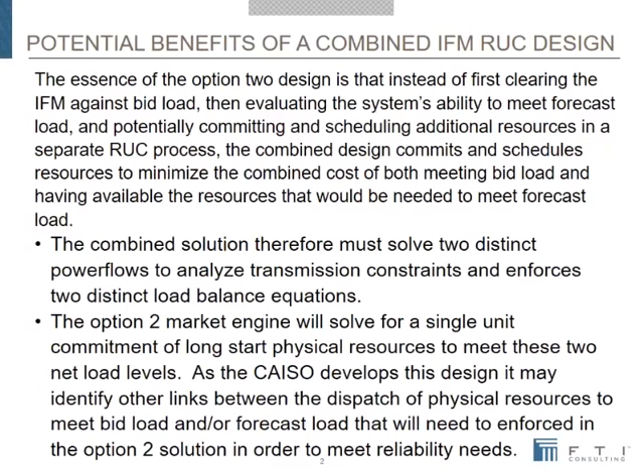Shammy's gotten everything fixed up wonderfully over the break, so that's why we needed to take it. Can I do my talk again? No.

I have a brief table there explaining my view of Option 2. I'm not going to go over that.

The first substantive slide here builds on some of the discussion in the workshop last week. The way I look at Option 2 is that while it's designed to accommodate the CAISO market, it also accommodates the operation of a traditional utility or a load-serving entity, as we have in the CAISO, to meet their load at least cost consistent with past practice. I don't think anything about this really changes how they have to operate—the utility can use their judgment to decide how much of their intermittent energy output they should rely on in buying power from others. They can judge how much they want to expect to buy real-time economy energy as opposed to buying energy day ahead, and make sure there are enough resources available to meet real-time load, which is just how vertically integrated utilities have operated for many years. They don't always buy enough energy to minimize cost day ahead; they recognize there'll be more economy energy in real time, so they hold off on some purchases, but make sure they have enough capacity or resources to turn on to meet load. So I think the design provides flexibility for vertically integrated utilities in the West, as well as California load-serving entities, to manage their resources.

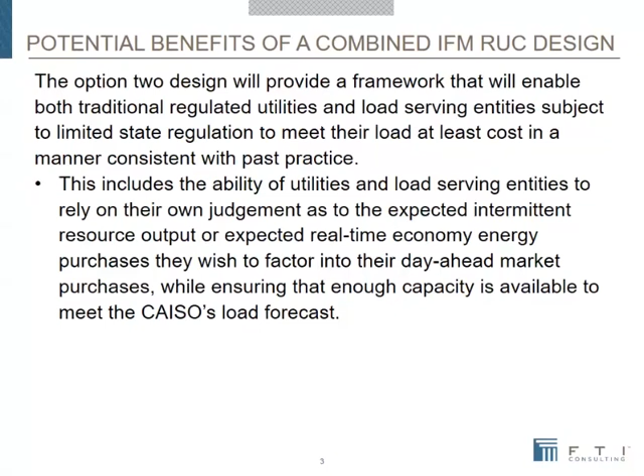There are five, as I look at it, potential benefits—and they're potential benefits, you don't necessarily realize them from Option 2—relative in some cases to the current RUC design, and in some cases relevant to the Option 1 design, and they're different. Sometimes they're different benefits relevant to different options, because there are a lot of different ways of doing it. I'm not going to talk about all of these in great detail, but some of them.

To go over them—a lot of these the CAISO has talked about—there's going to be more efficient commitment of long-start units and perhaps other long schedule commitments. We'll have binding day-ahead market schedules to cover all resources needed to reliably meet the CAISO load forecast, which isn't true today under the current RUC design, and they'll have compensation for the costs they need to incur. There'll be efficient and consistent prices across the resources scheduled to meet the IFM bid load or the CAISO's load forecast—again, that isn't true under the current design. And we'll have assurances that resources committed to meet the CAISO's load forecast can be dispatched to meet that load, which we do have today under the current RUC design, but might not have under some of the Option 1 designs.

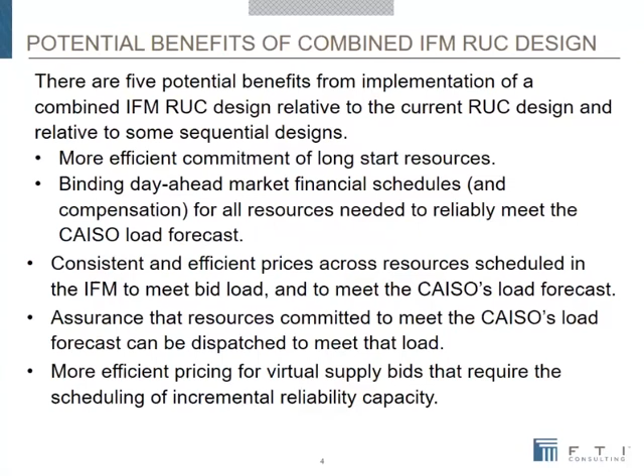In my view, we'll probably have more efficient pricing for virtual supply and demand, particularly virtual supply that requires the scheduling of additional reliability capacity—we'll see an appropriate price.

Now, the first one, in terms of the more efficient commitment of long start resources, this is a potential efficiency, but of course it only applies because we'll have more efficient commitment since we won't get into the potential of committing resources in the IFM and then committing other resources in RUC.

Then knowing that actually if we looked at all that problem together, we would have made a different decision. But as Michelle's pointed out and other people have pointed out, as we have fewer long start resources, that's going to be less important. It's also less important even today to the extent we're not committing resources because of the CAISO's load forecast, but because we want more flexible capacity or something else.

Because it's not clear how many of our commitments, even of long start resources, and I don't have the intimate knowledge of the CAISO and DMM of all this, but reading the things that are written, it sounds like operators are committing resources in RUC for a lot of reasons, not all of which have anything to do with the load forecast. So to the extent they're doing it for other reasons, first, if we can address those other reasons, we don't need to worry about the more efficient unit commitment. And if we don't address those other reasons, we have to recognize they're still going to do it.

One way or another, if we're not getting the right resources committed in the IFM, the combined IFM, in terms of flexible capacity or whatever it is, it's still going to happen. So this is a benefit, but we have to assess how much there's going to be.

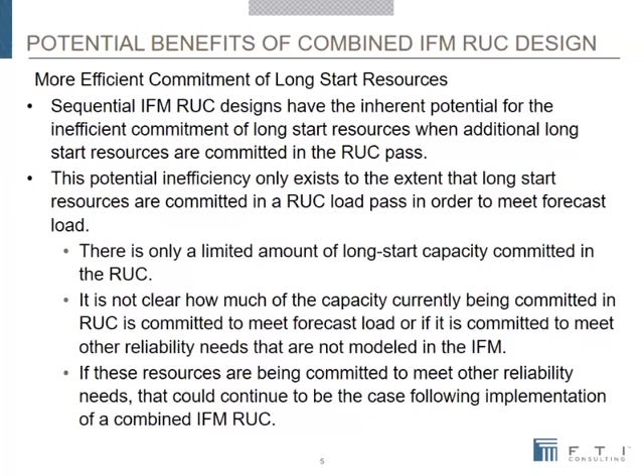The second one, which I think is important, is binding financial schedules for all resources needed to reliably meet the CAISO load forecast. And today we commit resources in RUC, and it's not just the CAISO, it's the same thing that MISO does and PJM and New York.

They commit resources, but they don't get any binding financial commitment, they don't get paid so that they can afford to schedule gas. They just get assured that they'll be able to recover their minimum load costs. And in my view, this is not working well anywhere. And it's increasingly not working well as the resource mix changes. And of course, California's got the most changed resource mix, so California is probably going to have to deal with it sooner than anybody else.

Did I do that? I guess the wind stopped blowing.

So I think that this is an important benefit, and I think most of the designs we're talking about will achieve it. And maybe we don't need it this month or next year, but it's going to be increasingly important as the system becomes more energy limited, we have more resources that are use limited, we're going to need to provide compensation for resources to buy gas and make other commitments.

So this is an important long-run benefit in my view, although I think we can achieve it with both option 1 and a number of versions, and option 2 and several versions of option 1.

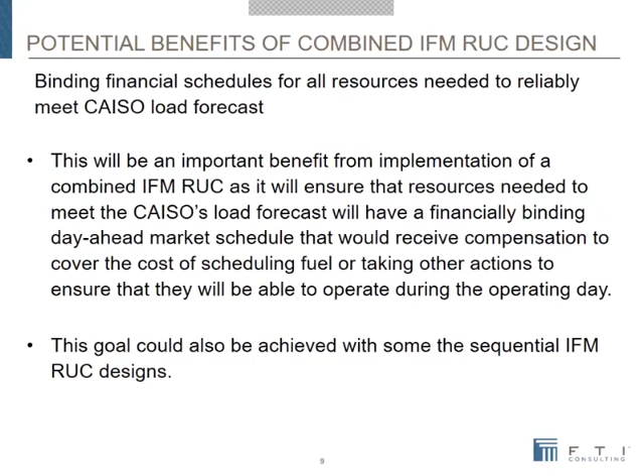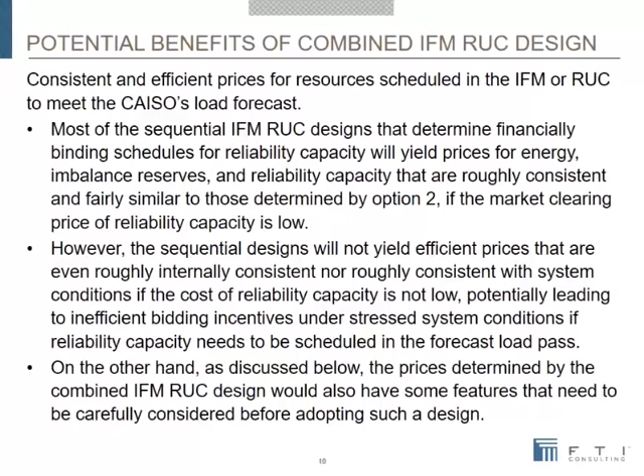The other... I think another important benefit that I don't think the CAISO has emphasized as much in its slides and discussion, is that it addresses some of the issues we have with the impact of virtual supply and virtual demand because of the explicit pricing of reliability capacity up and reliability capacity down.

So if you have virtual supply that proxies for variable resources that are being physically withheld from the day-ahead market and are not there, then when we get virtual supply that replaces them, that shouldn't force any commitment of additional resources. So that should be treated just the same as physical supply because it's moving us towards the right equilibrium.

And if we don't have to buy any reliability capacity up under this design, they clear at the same price as physical capacity. But on the other hand, if we have virtual supply that's in excess of the resources that show up in the day-ahead market and require us to buy additional reliability capacity up, then that reliability capacity up is going to have a price, and the virtual supply is going to clear at a lower price by that amount than the physical supply.

So we're going to have a more efficient signal in terms of virtual supply when it's moving us closer to where the CAISO forecast output to be, and therefore isn't requiring commitment of additional units, is actually eliminating the need to have reliability commitment. They won't pay that price, but if they're moving us in the other direction, towards having to make other commitments, then they're going to see a lower price, reflecting the cost of those other commitments.

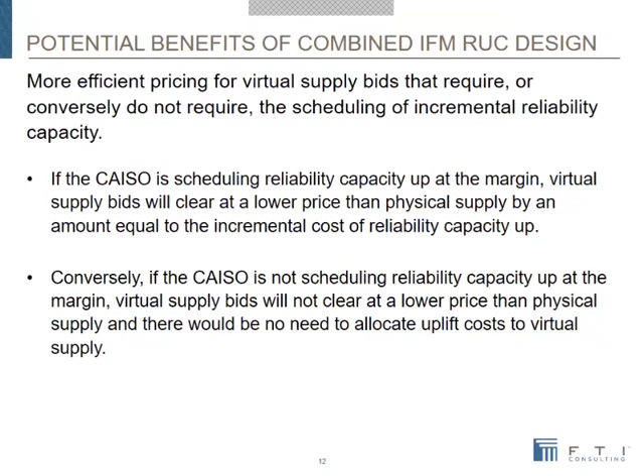There are a few challenges, I think, to get to the other side of it, as Michelle asked me to, and I can talk about some of them. Some of them I think you can just read, it's straightforward.

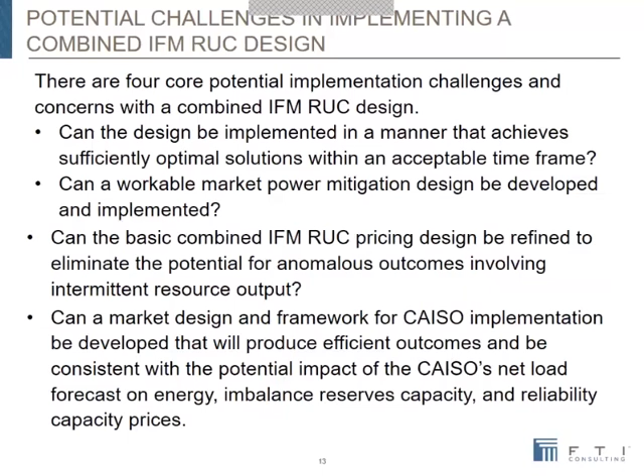I think one of the key issues is just, can we do it? What are the impacts on solution time of doing it? That's really the first thing we have to be sure of, or at least reasonably confident, that we can implement this, and that the implementation will not have such severe impacts on solution time that we're worse off. Now, it has the potential to improve solution time, because compared to now, you won't have to run two passes, an IFM pass and a RUC pass. You're just going to do it combined.

But there are some solution challenges. And I know the original reason the sequential approach was developed was because the vendors said they didn't know how to solve the combined problem. But now it's later, and I think it's got some challenges.

So that's, I think, the first question the CAISO has to work down the road a little bit: can we solve this on a constrained network with all these things that have to be enforced between the two solutions? So that's a qualification, but it's not anything negative, just something we have to make sure we can do.

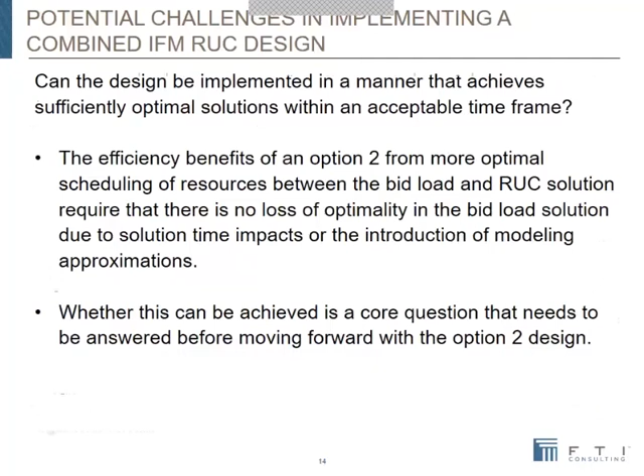I think the market power mitigation, we have to deal with it. I don't think there's anything real complicated about that at this point, so I'm not going to spend time on it. This is one of the issues we've been talking about.

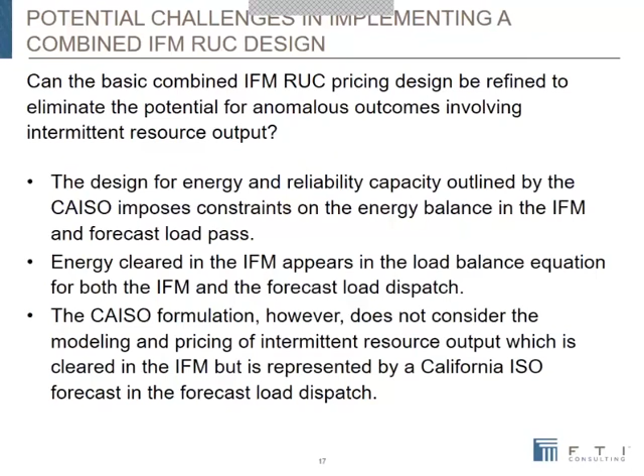My concern about the equations is that we've been talking about just equation 1 having just energy, but it's actually got cleared energy on thermal units and cleared energy on intermittent units. And the load balance equation 2, the output of the intermittents that clear in equation 1 isn't in there, it's just the CAISO's load forecast.

So if a generator gets paid lambda, the shadow price of equation 1, for its output that's cleared in the IFM, and only gets paid the shadow price of equation 2 if it's in equation 2, that means all intermittent resources that clear in the day-ahead market would get paid less than thermal resources, which isn't the right answer. I think there are ways to solve this, I talk about a couple possibilities over the next couple of pages, but we need to think through them.

Their alternative approaches have impacts. So I think the CAISO needs to talk a little bit about how exactly are we going to compensate the intermittents, the amount that they're bid in the day-ahead market versus the CAISO's forecast. We don't want to pay them if they bid more than the ISO's forecast, so that the ISO ends up committing forecast load for them, but on the other hand, we don't want to pay them less than their value. So that's an issue that needs to be worked through.

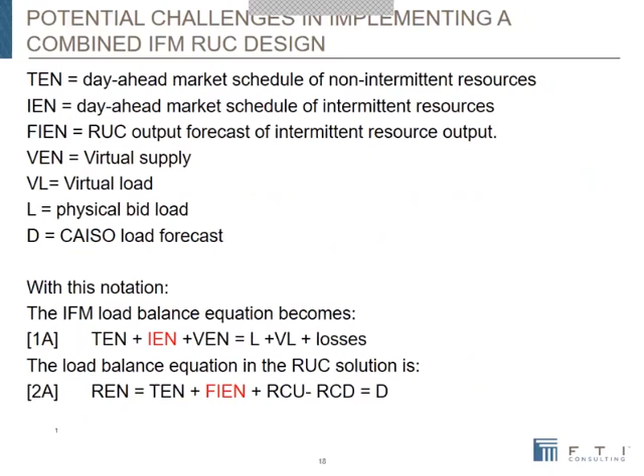And these sort of talk about that problem. I'm sorry, Carrie?

Carrie Bentley with the Western Power Trading Forum. So it seems like you're skipping through these very quickly, so I'll just say I appreciated them, and that's good. And while you're thinking about that, can you think about storage too? Because it seems like storage is going to be paid lambda, but then pay to charge. So to me, I think there's a disconnect there - if your discharge is paid, under the current formulation, the sum of the shadow prices, but then because it's load, it would just charge at lambda, or the first shadow price. So that's confusing to me too.

Well, I mean, it depends - if it were charging in the day-ahead market, and if it's both charging and discharging in the day-ahead market, which it will be, then I think the prices will cancel out. It wants to charge in an hour in which lambda is low, and I'm not sure because they're saying it's going to be allocated outside the market, right?

What is allocated? The reliability charge. Okay. Now we got to the second one. That's the other place where I disagree. But that's the proposal.

I think the way I look at these, as I said, if you look at the examples I put out, you can see that if a physical generator clearing in IFM gets paid the sum of the two shadow prices, that will generally equal its incremental cost if it's marginal. In a few cases, it'll be higher than its incremental cost because there's an opportunity cost of providing the RCU, the reliability capacity up.

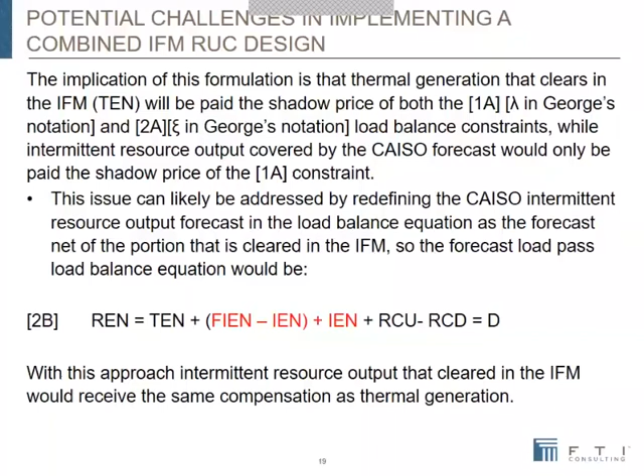So I got out the other thing that I don't agree with, which is that I think the cost of the reliability capacity shouldn't be socialized, but should largely be charged to the real-time load, and the error, the part that we get that's extra because the CAISO's forecast is too high, that will need to be socialized, which gets to the remaining couple of issues here that are not really disagreements, they're just challenges. They're things we have to take seriously. I think the one impact of...

The combined approach—and it's also under some of these option one approaches—is that the CAISO's load forecast is going to have more market impact. So it's something the CAISO's going to have to be comfortable with, and the market participants are going to have to be comfortable with, and the CAISO can't have a purely mechanical approach. I think there's going to have to be judgment applied as to what's a reasonable forecast, and that may make people uncomfortable. So it's going to have market impacts.

It can, because there's potentially an interaction between the price of reliability capacity up or flexible capacity up and the price of energy, but especially the difference between doing it in two separate processes versus combining it.

There's going to be more interaction, so the CAISO's forecast has become more important. I also think that the imbalance reserves penalty price is going to be significant. We have to think about when we start scheduling RUC and the imbalance reserves in the day-ahead market.

There's more potential for all of those things to add up to a high number relative to supply and drive up the price of imbalance reserves and flex ramp. But we ought to think about what the shadow price of the imbalance reserve should really be. Should it really be $247? Do we want the price to go to the clearing price of energy plus $247 if we don't have enough to meet the CAISO's load forecast plus the flexible capacity up requirement?

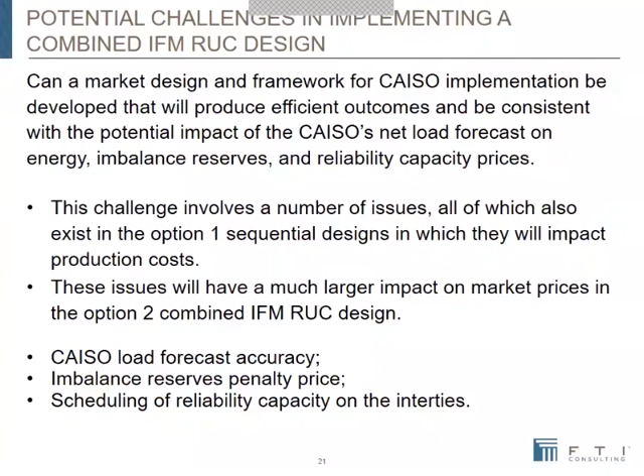This takes us to our third and last substantive agenda item. So, Gabe, we're going to be talking about default energy bids for storage under ESDER 4 with a focus on cycling costs. I just posted the shortest presentation you've ever seen, one slide. That's because it's copyrighted material that can't be posted on the ISO website. I will be showing a slide of that material later, so my presentation is actually two slides, which will follow his.

All right, I guess I'm signaling here the beginning of the end. Okay, yeah, so as Ben said, I'm going to talk about... Churchill said this may not be the beginning of the end, but it's the end of the beginning. Yeah, something.

We are talking about storage default energy bids. This is something that we're taking on in the ESDER 4 initiative. For everybody who doesn't know, I'm Gabe Murtaugh, Senior Infrastructure and Regulatory Policy Developer here at the ISO. Essentially today we'll talk about the items that we've been discussing in ESDER 4 through that initiative, and I've just outlined a few high-level bullet points to walk through.

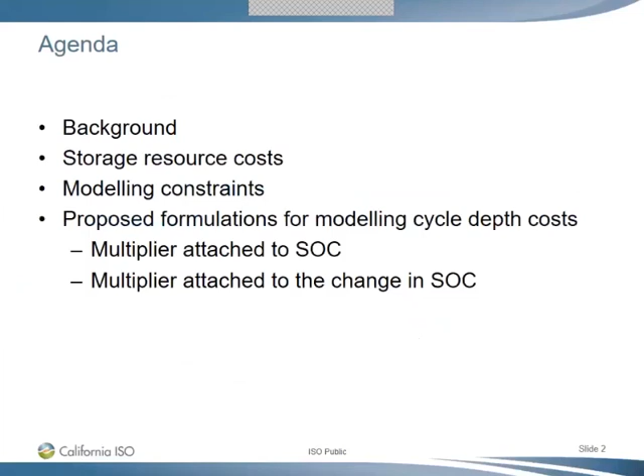First, there'll be a little bit of background on storage resources in the ISO system and the direction we see them heading, storage resource costs, and modeling constraints that we have here in the ISO with our current market systems and designs. Finally, and this is sort of the meat of the presentation, we'll go through two different proposals for how we could potentially model cycling costs. One has to do with attaching a multiplier to the specific state of charge for the resources, and the other is attaching a multiplier to a change in state of charge from one interval to the next interval.

So getting into the presentation, in the ESDER 4 initiative, the ISO is proposing to implement a default energy bid for storage resources. Currently, there is no default energy bid for storage resources. This isn't such a huge problem, as I think the ISO currently has about 150 megawatts of storage installed on the system. That's grid-connected, utility-scale batteries, not including anything behind the meter.

There's a considerable amount of storage in the interconnection queue to potentially join the ISO system, and the CPUC in their most recent RA proceeding has been discussing potential RA shortfalls in the next few years, and mitigation measures to address those shortfalls may include procurement of additional storage resources. So there may be much more storage coming onto the system in the next few years.

If that were to happen, we'd want to start thinking about default bids and how we would treat storage resources in the system, and try to have our hands around marginal costs for those resources. So that's what we're trying to tackle here.

Storage, in addition to the RA issues I brought up, has also been proposed as a solution for local issues. There's a resource retiring, and a transmission project may be expensive or take a long time to implement. A storage resource may be proposed as a stopgap solution.

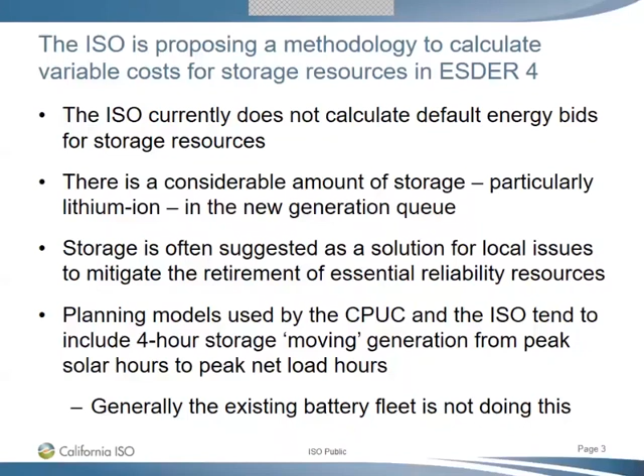Yeah, and that's specific to the real-time market. Yeah, I agree with that. Okay, so on to the next slide.

One question that's been asked is, if those spreads at different times line up fairly well with net load curves, why don't we see storage resources on the system doing this today? Well, there are a number of reasons, but primarily they're not looking to capture a spread between those two time periods because it's expensive to charge the resource and discharge the resource.

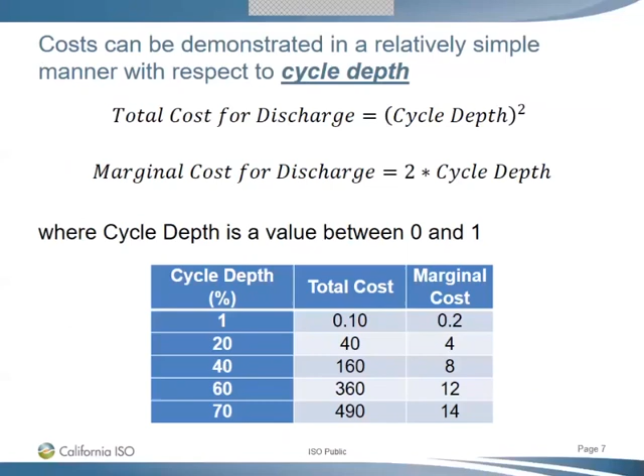It's Adam Slother from DMM. If you go back to slide 6 for just a second—so when you say estimated cost and estimated replacement cost, are you talking about cell augmentation cost or full replacement of the resource? I'd have to double check that.

I think it's cell augmentation, but I'd have to double check. I'd say it's an important distinction to make, because at the point that you're talking about reflecting the full cost of replacement of the resource as part of a marginal cost, I think that's a different paradigm and something we don't necessarily want to do. The cell augmentation, I understand, gets a little tricky because at some point when you've replaced all of the cells, you've essentially replaced the resource, but it seems like there's still a little bit of a distinction there, so it'd be good to clarify.

I agree with you there. I think one of the challenges we might end up having is actually estimating those cell augmentation values, and we may need to use potentially full resource replacement costs as maybe a proxy for that, but perhaps not.

So far, we have reached out to several stakeholders and some of the manufacturers, and we've had a lot of trouble nailing down real numbers. There are some capacity numbers in the industry literature, but a lot more storage resources are used in the automobile industry than in electricity currently, so those numbers are more readily available than utility-scale storage numbers. Those are all pieces of the puzzle that need to be parsed out, and it's relatively complicated to get a good estimate on what replacement costs might actually be.

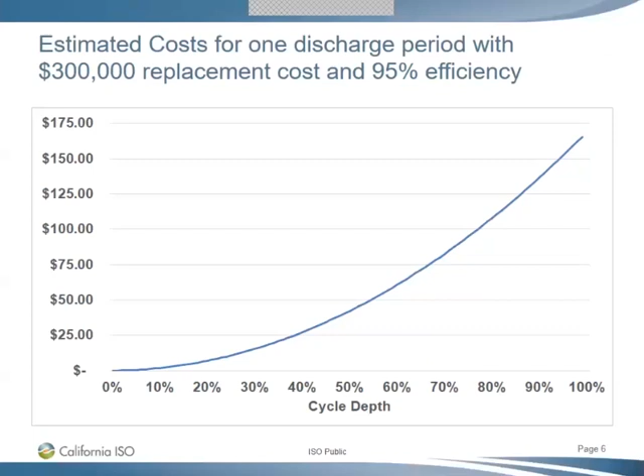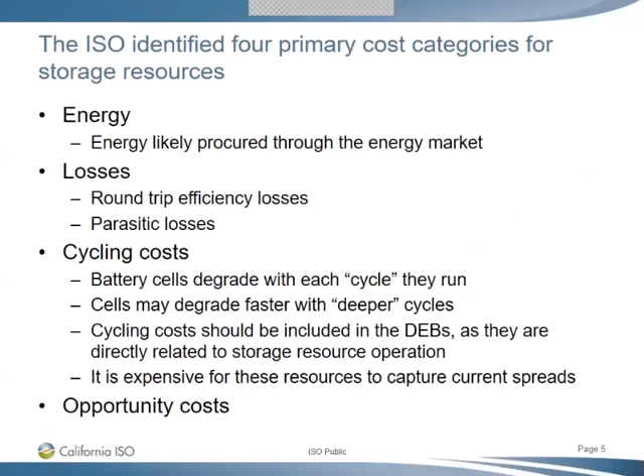Can you go back one slide on page 5? Just for my education, what does it mean when you say it's expensive for this resource to capture the current spread? Can you give an example? Sure, so today...

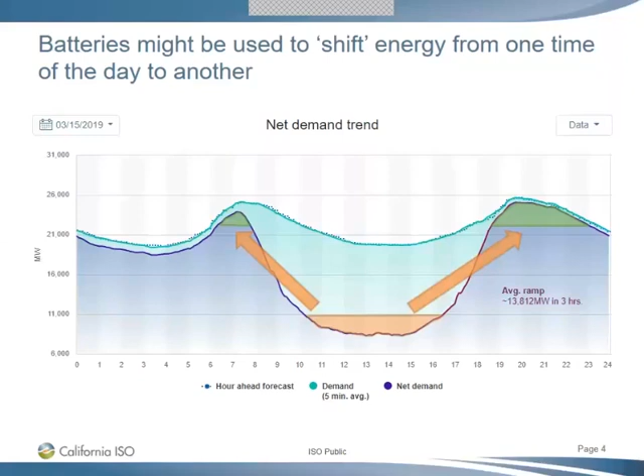So thanks, Graham. Any other questions? Shami, anything on the phone right now? Seems to be a good call. Good point. Okay.

So we've laid out two potential ideas on how we could capture marginal cost for resources, and specifically the marginal cost related to cycle depth.

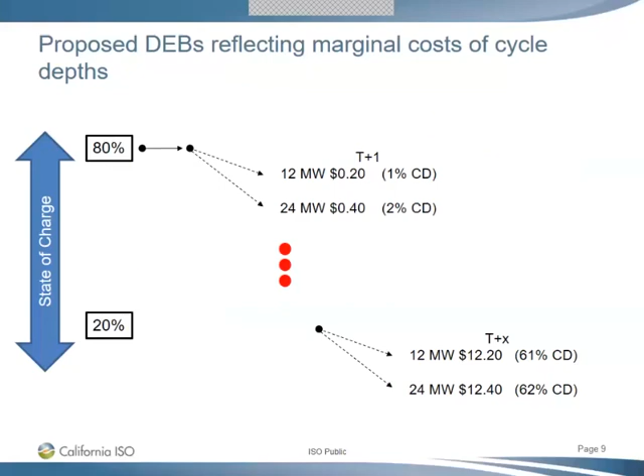Okay, so pros and cons to modeling the resource in this manner. Pros: if we assume that the cycle depth is just the cycle depth squared, then we can be assured that this model will always be greater than or equal to the cost to operate the battery. This aligns with increasing marginal costs, so as you go deeper into a discharge cycle, the costs increase, and that's what we've read in the literature. That actually happens here in this model.

And then the price for any discharge increases as the state of charge decreases, and the market outcomes will tend to charge the battery because it prefers to operate closer to the 80% range than the 20% range. Graham, to your point, we might add something that says if you're operating between 60 and 80 where it might be more expensive, there could be an additional adder there to prevent the resource from always going back up to the 80% state of charge.

The cons to this model is that it may actually grossly overestimate the cost to produce. Remember, cycle depth is a function of where you start your discharge from and where you end. So if I start my discharge at 60% and end at 40%, that's a 20% depth of charge. But if I start at 50%, charge to 60%, and then discharge to 40%, that first discharge is modeled in the paper we've been looking at such that the first 10 megawatt hours of discharge are associated with just a 10% discharge, rather than if you were starting at 80 and going down to 40%.

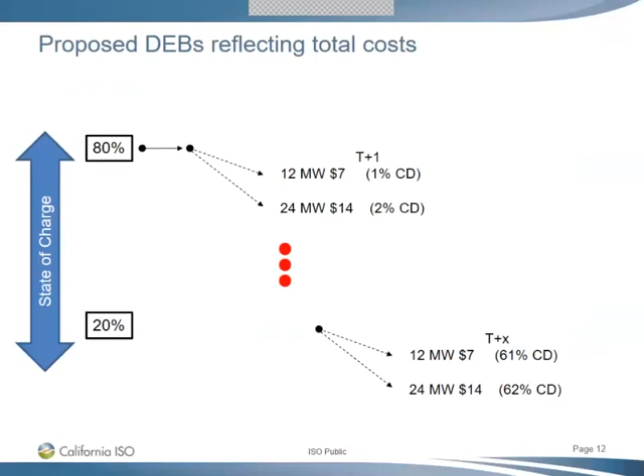So we've got some pros and cons for this model as well. It may efficiently dispatch the resource for a given number of megawatt hours if you set your rho appropriately, and that might take some doing to work out the math to get the right value there. And you may consistently produce the correct price on average, but you might not get the right price at any given particular dispatch interval.

The cons: it's going to overestimate costs for large dispatches when cycle depth is thin. So if you are sitting at that 70% or 80% state of charge, generally you won't be very deep in your discharge at that point, so prices would be relatively low to make those discharges. Generally the second model would overestimate those costs.

And then it might also underestimate costs when you're very deep in it. So if you've gone all the way down to 25% or 20% state of charge, it would estimate that same range of costs. So small dispatches might actually seem relatively inexpensive compared to what the actual costs are because you've already dispatched or discharged your resource by so many percent.

Okay, I think those are the two models that I have, and I will stop and pause for questions.

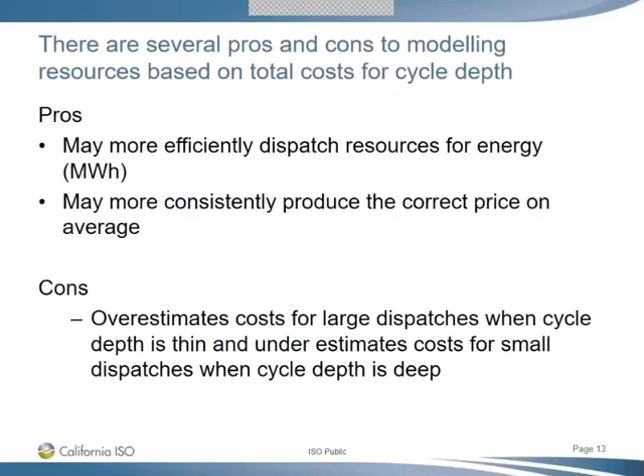So the idea would be that bids could actually include this cycle depth parameter, as well as default energy bids that we use to calculate internally what we believe the marginal costs are for the resource.

Okay, so I'm trying to get a sense of whether the paradigm here is a storage resource that has certain capabilities and limitations, and we're going to fit it into the 24-hour market solution in a way that maximizes something or minimizes cost, that wouldn't look like an hour-by-hour energy bid. But it sounds like you're still approaching this as an hour-by-hour energy bid, adjusted by the CD, because the CD in any given hour seems to be a function of how some other hour clears.

That's right. So is the CD determined endogenously as part of the market solution then? Yep. Okay, and is the energy price, the energy cost also, or is that a bid parameter?

That's a good question. The specific endogenous parameters here are the P's, the dispatch instructions for each interval for a specific resource, determined by the market solution we arrive at. We haven't spent a lot of time thinking about how to calculate the costs to procure energy for the resource, whether that's an estimate of what we think they actually paid for energy, or what we think they will pay for energy. My thinking currently is that it's an estimated value we come up with, and it may change on a daily basis. But that's a very good question, and we haven't quite wrapped our hands around that problem yet.

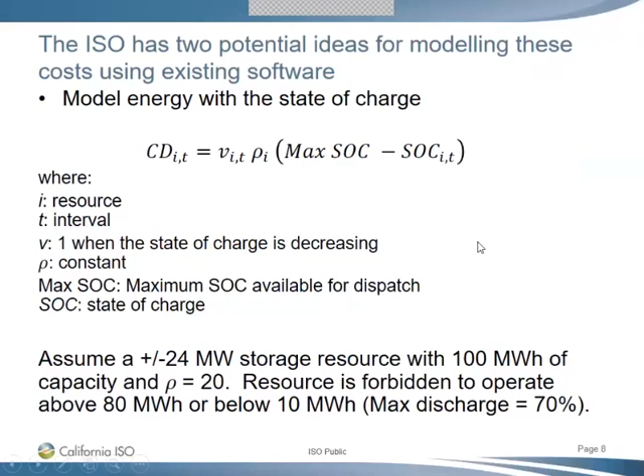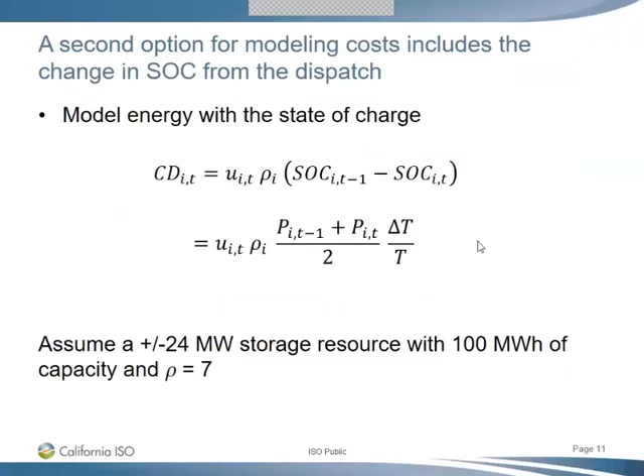While we're waiting for him, I'll just ask more stupid questions. So is the general idea here that there'd be an energy bid that's kind of like a standing offer, and is the bid functionality such that you would clear them in, I'm still wondering the mechanics of, if I want to charge in one of the hours from say midnight to, let's say 8 a.m. to 11 a.m., but not every one, and then I want to discharge in one of the hours. So these things are all solved simultaneously, and are those types of constraints honored in this kind of setup?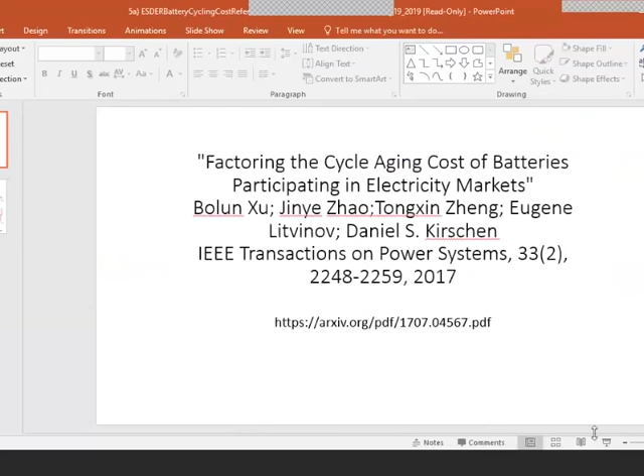So I don't think in this kind of setup per se. I think you'd get a bid curve, and if the market optimization found out, oh hey, you're economic to charge for 2 of the hours because we think we know what it actually costs you to do - maybe a 20% charge and a 20% discharge, and that's economic to do - then the market would schedule you for that 20% charge and 20% discharge, even though you may have thought to yourself, oh hey, I'd really only like to charge and discharge 10%. So the idea would be that would be more of a market determination rather than a participant determination.

Right, and that would be based on some kind of cost minimization notion, based on bid-in parameters of some kind. Yeah, okay, thanks, that's a great question though.

The other thing we're working on in phase 4 is a state of charge parameter, where you may be able to specify specifically what you want your state of charge to be at the end of any given hour, and then the real-time market respects that. So if you say you want to be charged at 70% at the end of hour ending 5, the market will optimize you to make sure you're charged at least 70% or higher at the end of that hour.

Yeah, one of the reasons I'm asking, or I've been thinking about - I'm nervous about imposing too restrictive a bid structure on a new technology, especially when there's potentially innovation going on that might have a lot of heterogeneous characteristics across different technologies. So that means I would like to give a lot of headroom, but I'm not sure what headroom even looks like.

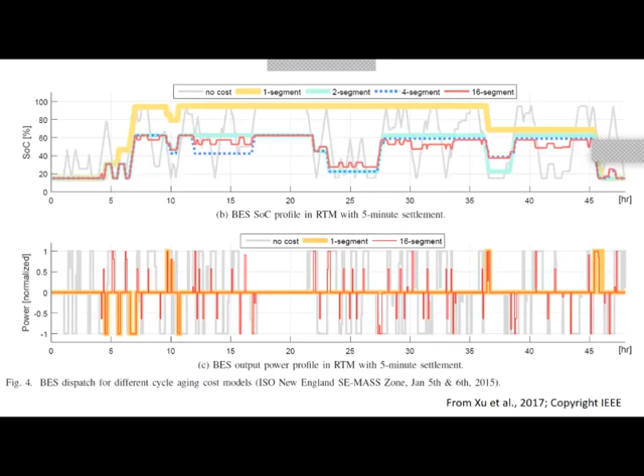So this is the figure, and again, I'm sorry that this can't be posted. However, any of you can click on this URL and get this article. Let's see, is there any way I can move a mouse around? Okay, I can't, unfortunately. For the folks in this room, I can use a laser pointer, but that doesn't help you online.

So what do we have here? The top figure is the battery's state of charge over a 2-day period under different approximations.

The bottom figure shows what it produces over those 48 hours. This is looking at the real-time market in New England. This is just 2 days, and he actually did this over an entire year, but you get a sense of what happened.

First, the light gray lines are if there's no cycling cost at all. All you have is the inefficiency. You lose 15% of the power in a cycle from charging to discharging, but there's no shortening of the lifetime. In the top figure, the gray line shows the battery moving from completely discharged to completely charged. Its minimum state of charge is 15%, it can't go below that, and it looks like it goes all the way to 95. You can see it bounces around a lot, hitting rock bottom about 10 or 15 times and then completely charged about 10 or 15 times in response to the volatility of real-time prices.